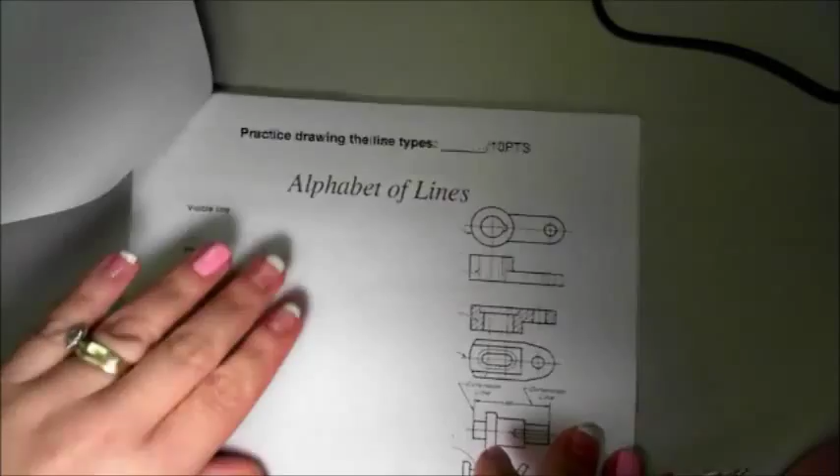So you're going to practice on this side. Then our next sheet here shows the alphabet of lines. These are the different types of lines that you will draw.

You're literally going to practice drawing the line type. The first one is a visible line. This is practice drawing, you are not drafting, you are not using a straight edge. You're going to do this all freehand.

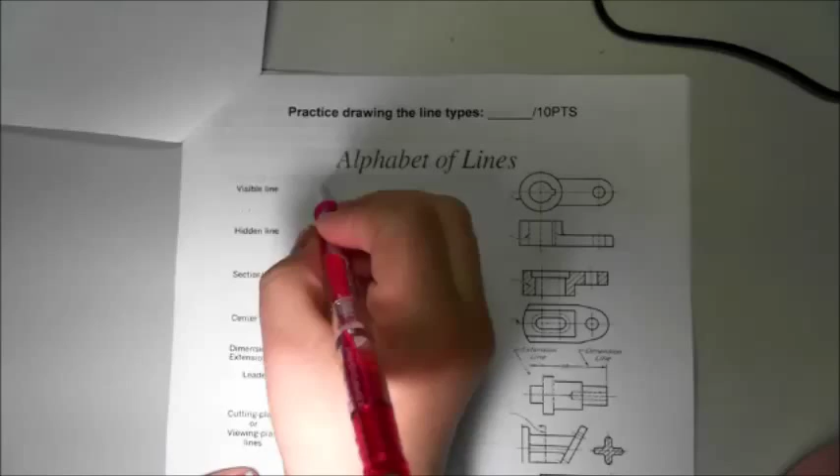So you're going to draw a visible line. A visible line is not the darkest line, but a pretty dark, straight line.

Hidden lines show us inside of an object. So like here it's referring to this, see the little dash, dash, dash? That means there is something inside of that view, inside of that object, that you can't see but you need to know is there.

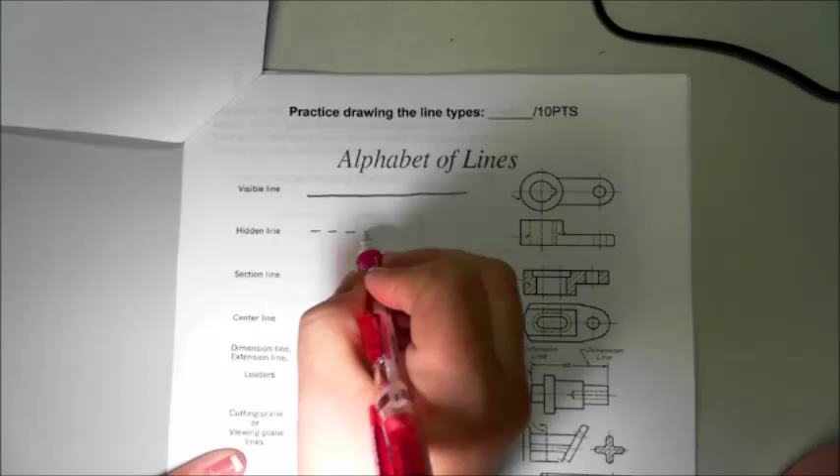Like for example, the hole right here. So our hidden lines are going to be lighter, dash, dash, dash.

You're looking for a uniformity of the length of your dash and a break in between, and it's not quite as dark as your visible line. Visible lines should be darker than your hidden lines.

Alright, section lines. These are going to be light lines also. Section lines are here, same object, we have it going through, and you'll notice these are also referred to as your hatch lines.

What do these mean? This means this is the material of the object. We've pretended we've taken a knife and sliced it in half. So we're going to draw our section lines.

So I'm going to practice by rough sketching the object there to the right.

This is not a perfect sketch because we are just practicing sketching. The hole comes through there.

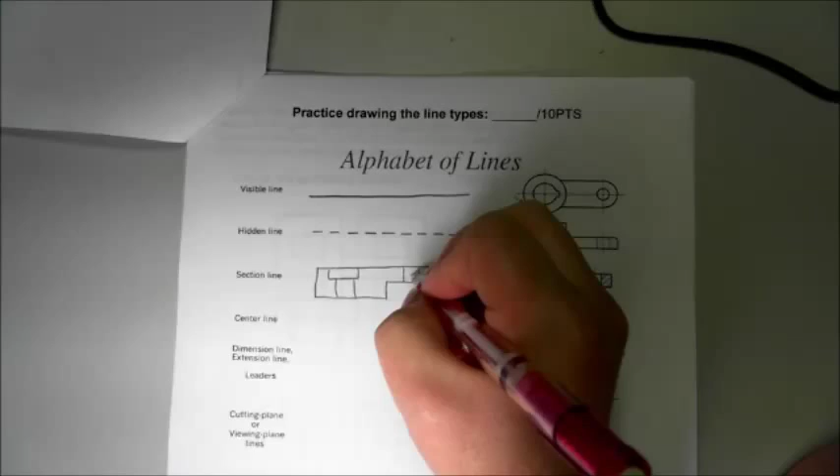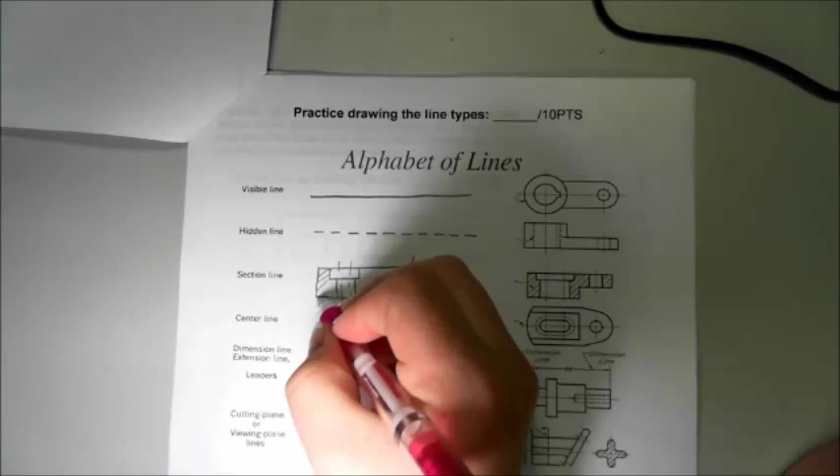Center lines. And then I'm going to practice my hatch marks, those section lines, on the 45. The object line will be darker, and then your hatch lines will come in and they'll be kind of dark, but not the darkest.

Your visible lines should be darker. They should be on a 45 and they should be darker. Again, we're freehand sketching this, so I'm not going to get too upset with you as long as you're practicing. This is just a sketch to practice and learn. Center line's pretty straightforward, it shows the center of an arc or circle.

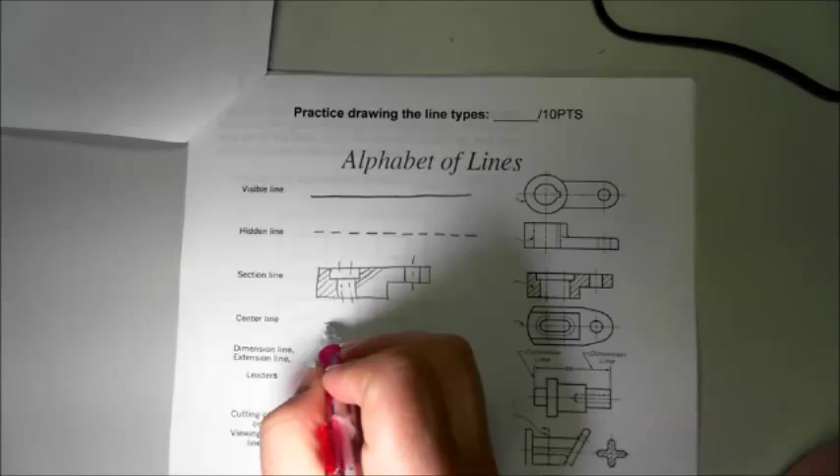Dash in the middle, break, long. A lot of times I'll call this the long, short, long, long, short, long. So long, break, short, long, break, short, and so forth.

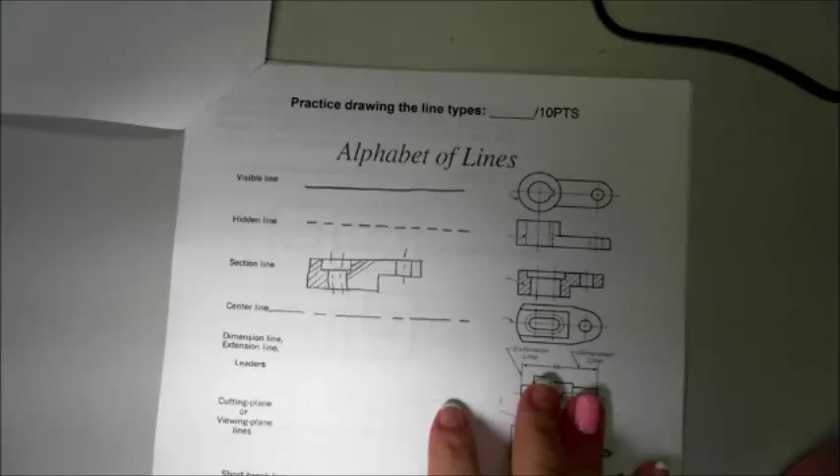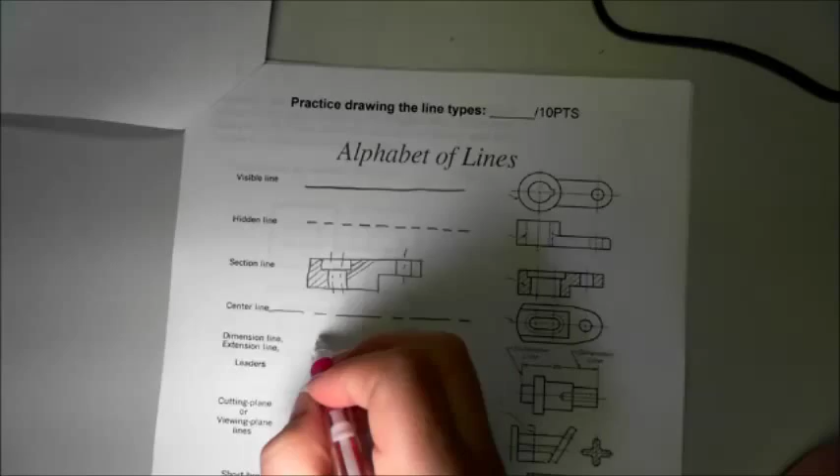All right, dimension, extension, and leaders. This gets confusing for some. Your extension line is what comes off the object, but that's not the dimension. The dimension is the actual line that has your leaders with the measurement in it. So we'll practice here. These are your extension lines. Next, the actual dimension line is a line that comes in between it. And then you would have a measurement.

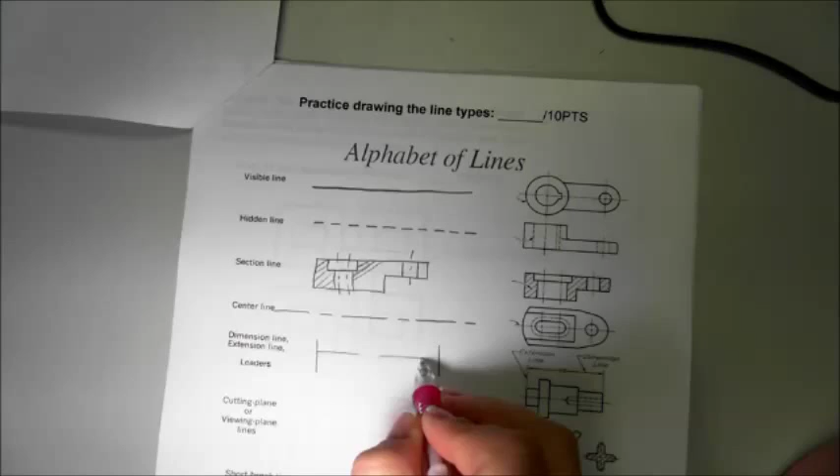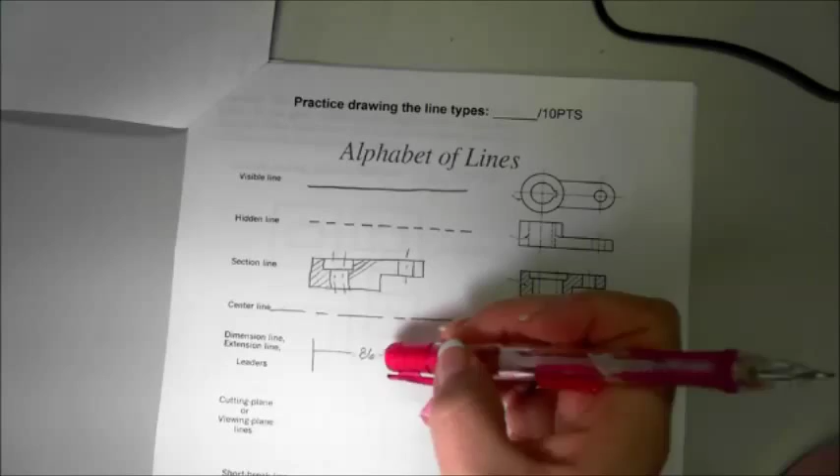Let's recreate this one, which is an 86. Notice how my text height is about the same, didn't change it up. I kept it the same height, approximately 1/4 inch tall. If I get a little close to it, I can erase, and I can get my eraser shield if I can't get any closer, but for right now, this is just to show you that part.

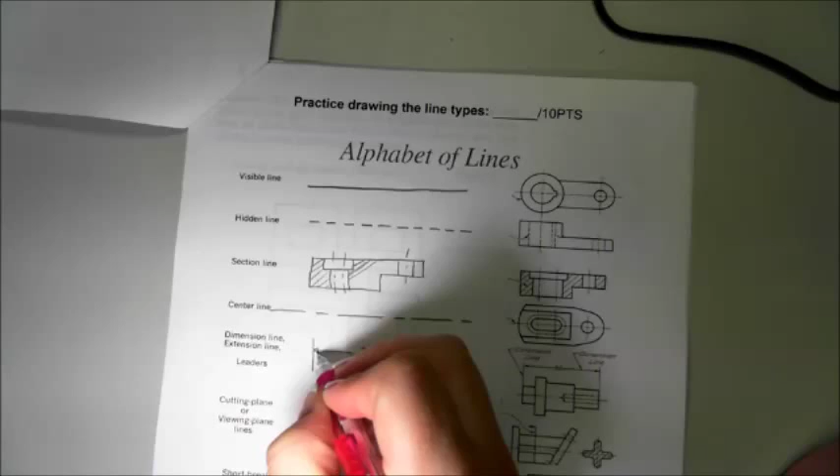And then you need your leaders. Leaders are typically an arrow, closed arrow, especially when we're doing engineering. Or if you're doing architectural, it'll be a 45 miter hatch mark. Cutting plane or your viewing plane - this is if you need to go in and cut an object to show those section and hatch lines like what we have up here.

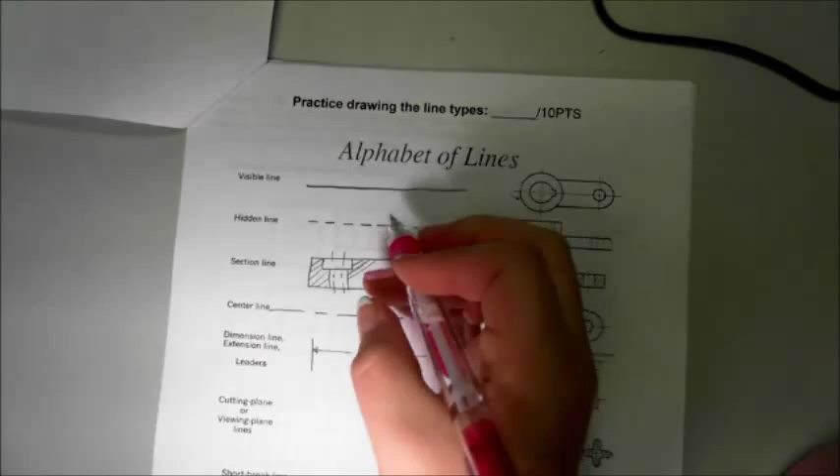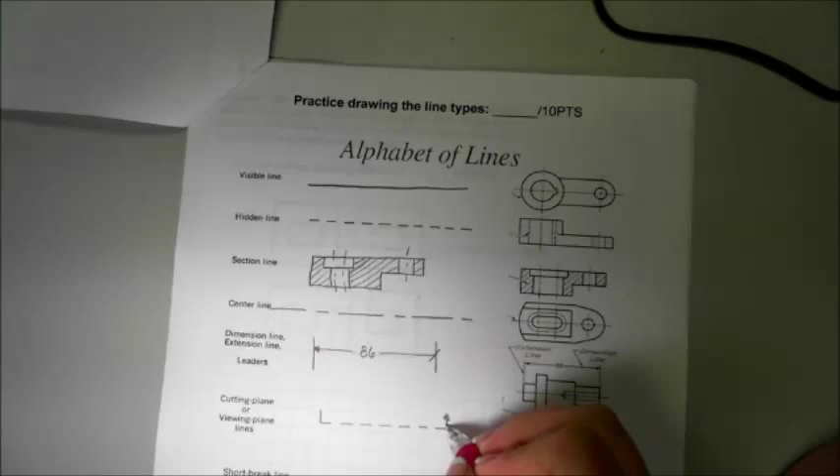So for that one, it is very similar to a center line and a hidden line kind of combo. I've seen it both ways. Typically they're going to be a really dark hidden line, that same dash. Notice it's really dark, super dark, with arrows pointing in the direction of what's being removed. This is the part that's being cut and removed.

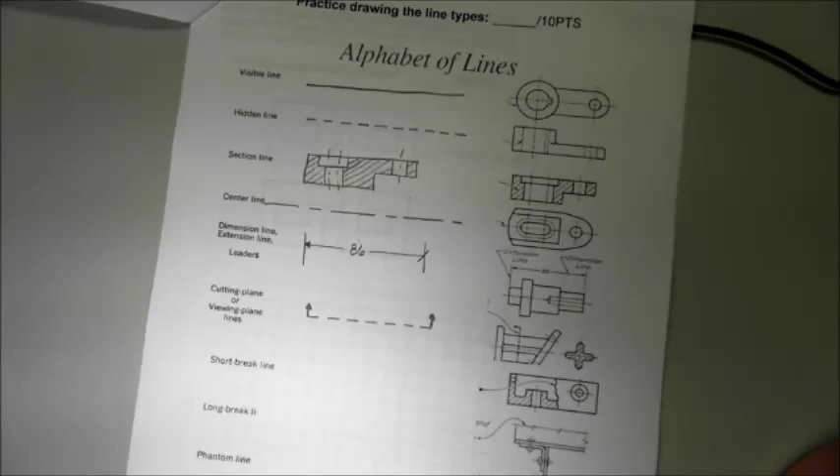Short breaks, pretty straightforward. Let's say we're dealing with something, for example a wrench, and the handle of the wrench is 5 foot long for whatever reason - actually, I've seen diesel truck wrenches that are that long. You don't need to draw all that area, and we obviously don't want to try to fit it in, so we use a break. You have a short break and you have a long break. Short break is pretty simple.

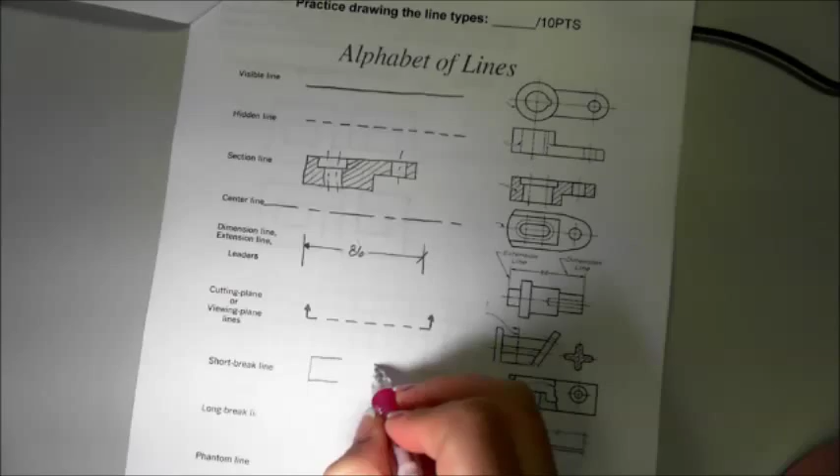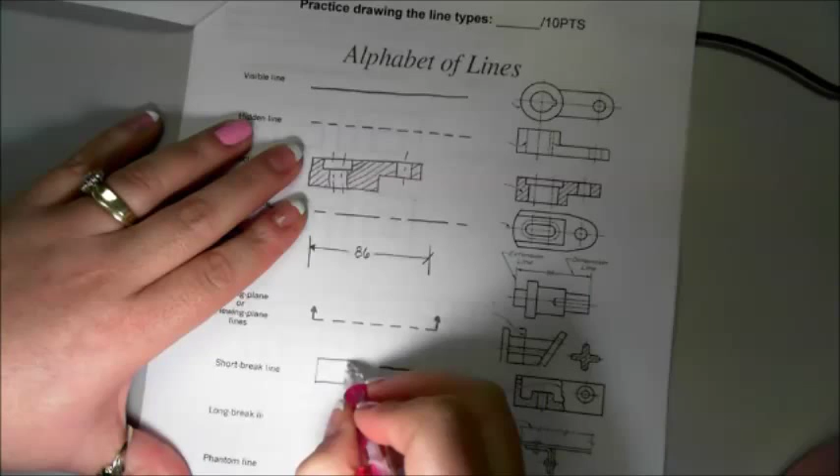So here's our visible of the object, right? Oops, we're going to make mistakes, it's going to happen. Okay, short break is real easy, it's just a jagged line, something like that, that's all it is. With a short break on that side, that's it. So that lets us know that this continues throughout the whole thing - we've just not drawn that section that's missing.

A long break is the same thing, showing the same similar concept, except this one is over a long distance. And this one is often referred to as the heartbeat, because that's what it reminds most students of. Heartbeat.

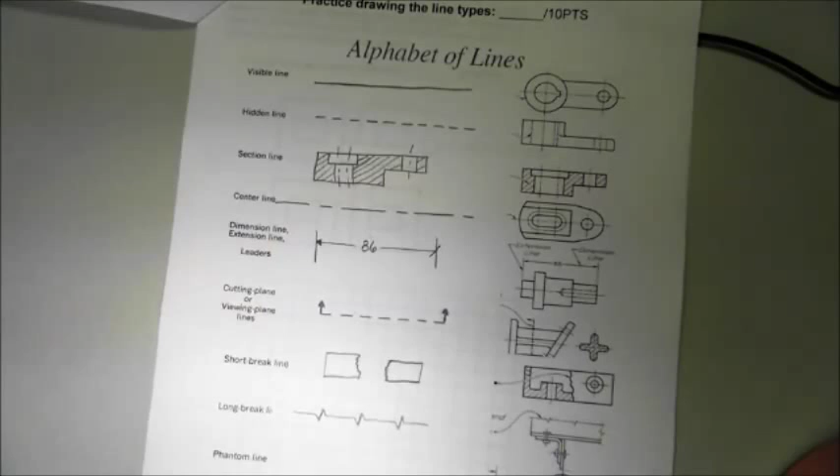Phantom lines, what are they good for? Phantom lines show you, like the arm of something, the direction in which it rotates, the direction in which it's going. Phantom lines are essentially really just a light center line. So here we're going to show, and we're just going to recreate the arc here. So here's my phantom line.

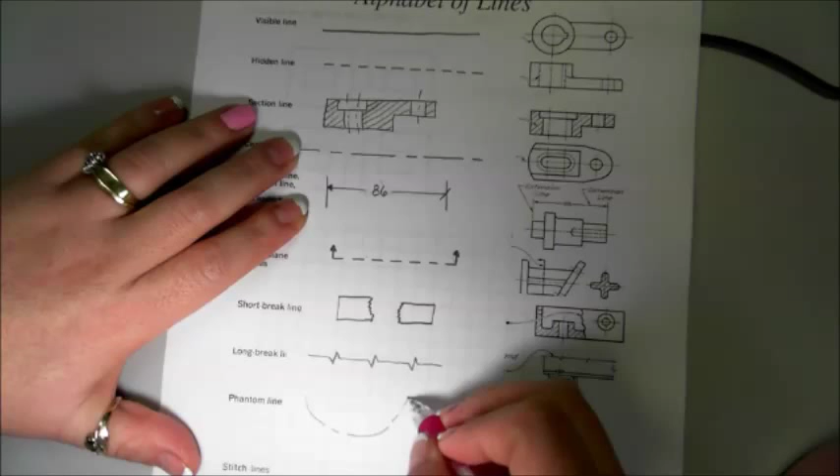So it's a light long, short, long, short, long, and it's showing where an object comes from. So in this particular case, there it is, that's what we're dealing with.

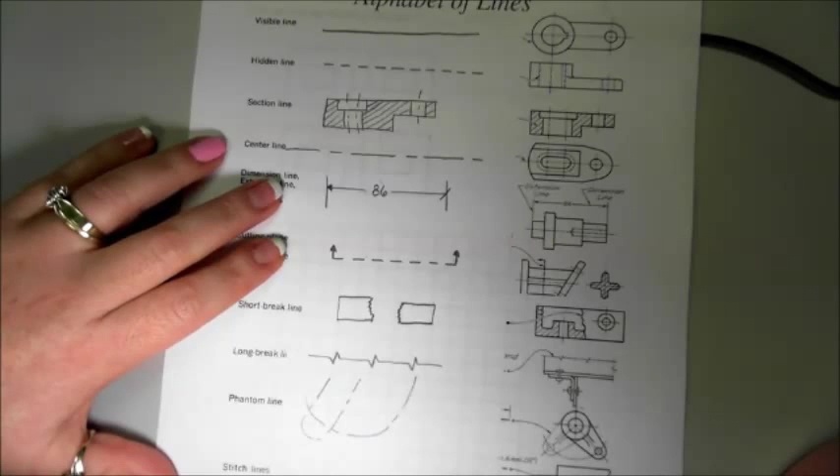We've got long, short, long, short, long, short, long. So it's just practicing drawing, just to practice for us.

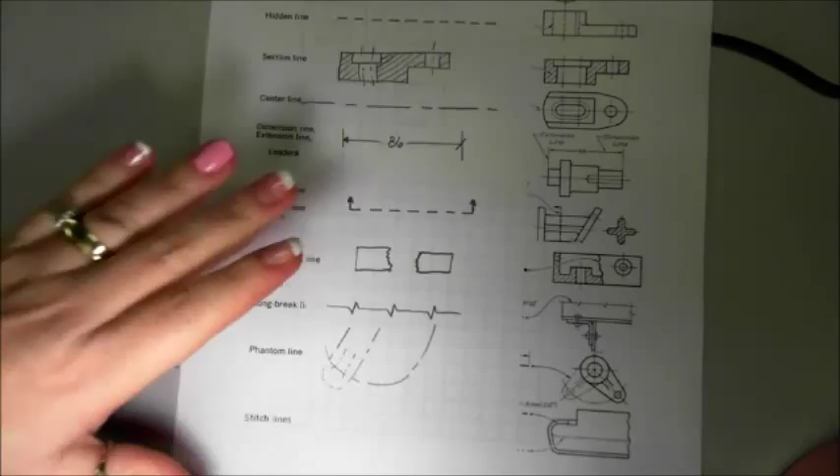Okay, stitch and chain are very similar. Stitch is literally like if we're working in sheet metal, and it's where items are going to fold together and essentially be spot welded together. Stitch isn't real hard - the thing is to keep them the same size and the same distance apart. They're just dots, that's all it is, it's not that big of a deal, it's just dots.

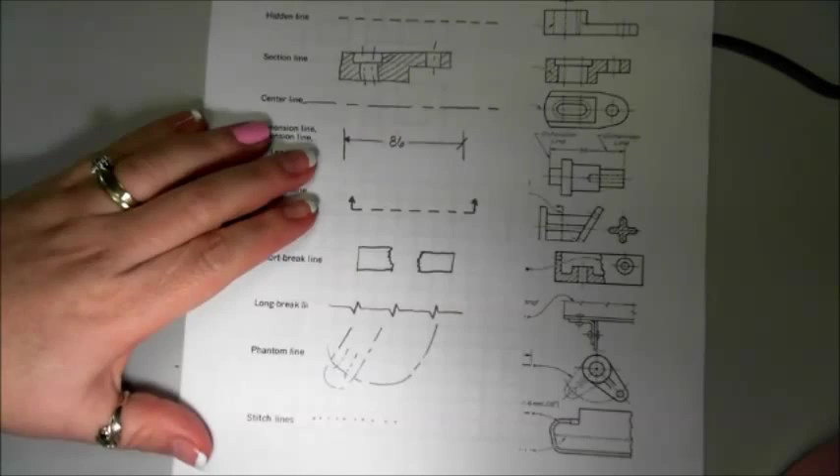A chain line shows where different things will end up coming together eventually. And chain line is really just, again, center line, but darker. So we'll practice that one - it's just, again, long, short, long, short, long, short, long, short.

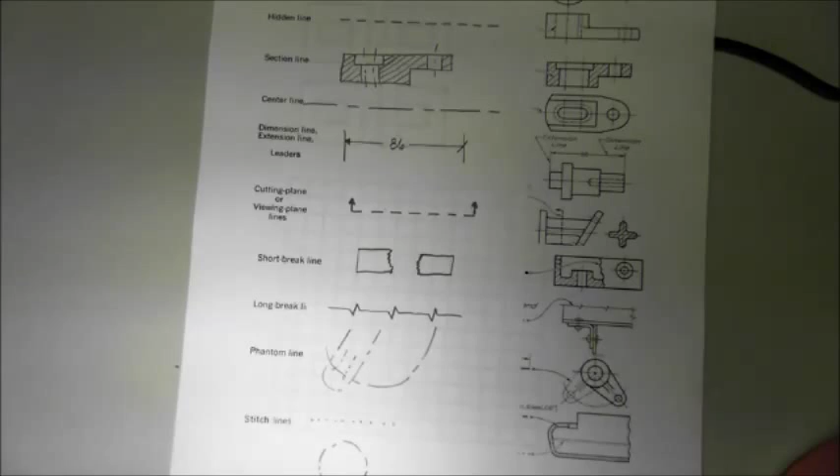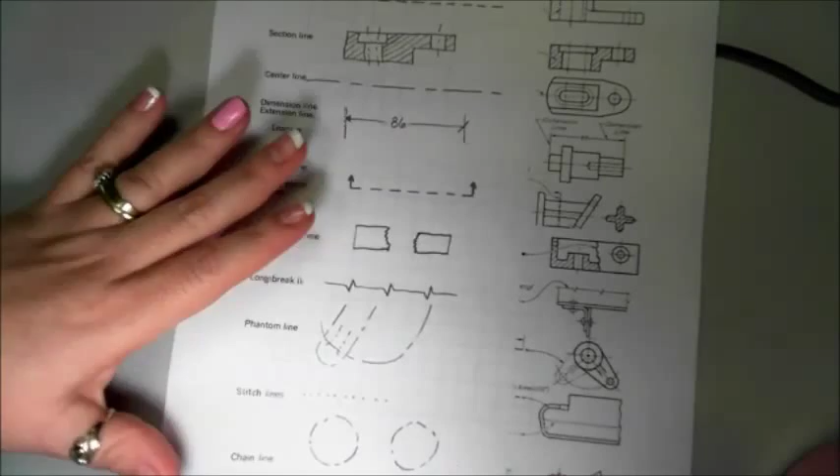And if you can't do that with your 0.7, get out your 0.9. Same thing. See how I can draw almost the exact same thing with my 0.9? Because I've been doing this for a long darn time. Alright, that's basic lettering and line types.